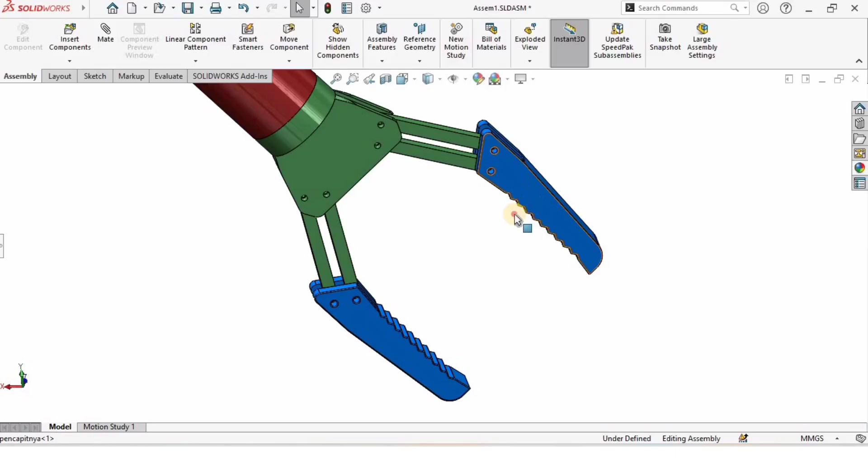In this tutorial we will be modeling a part of this robotic gripper in SOLIDWORKS. So we will be modeling this simple link in SOLIDWORKS. So let's begin. Open a part file and change the background to plain white and make sure that you are working in MMGS, millimeters, as units.

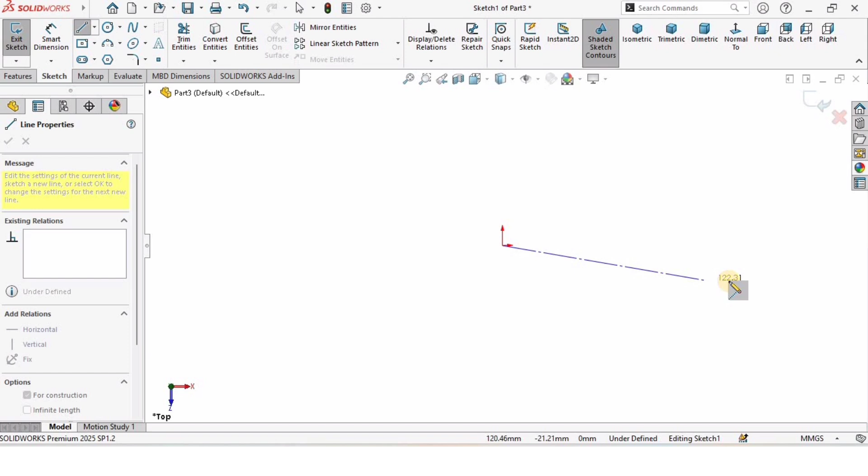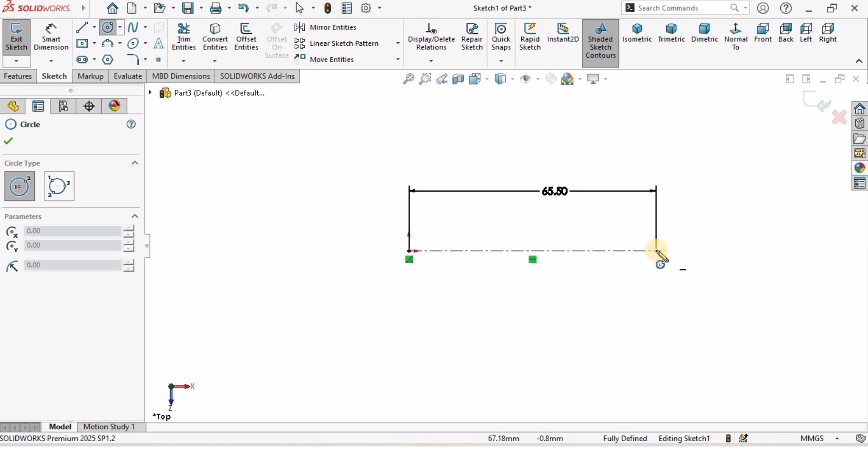Then I will create a sketch on the top plane. First I will create a reference center line at this origin. I will ensure that this line is horizontal, so I will assign a horizontal relation to this one. After that I will specify the length of this line as 131 divided by 2, or you can say 65.5 millimeters.

Okay, after that I will create a circle at this point and another circle on the same point, and then I will specify the diameters of these. So circle 1, this is 5, and the second circle, this diameter is going to be 14 millimeters. Okay.

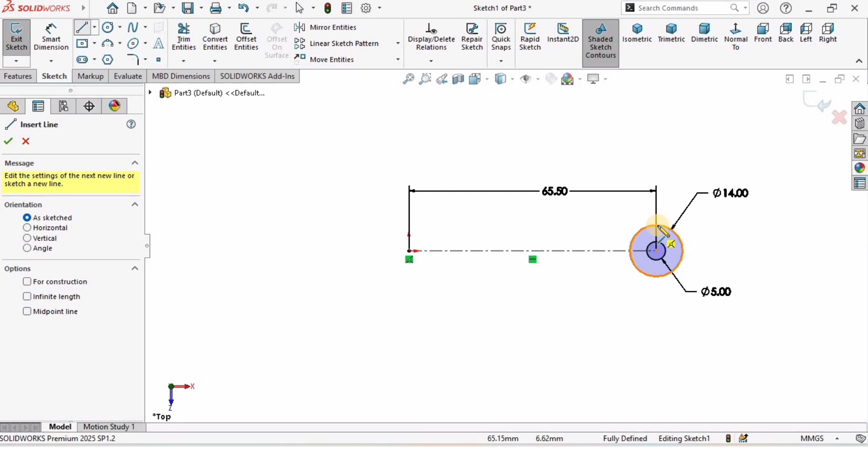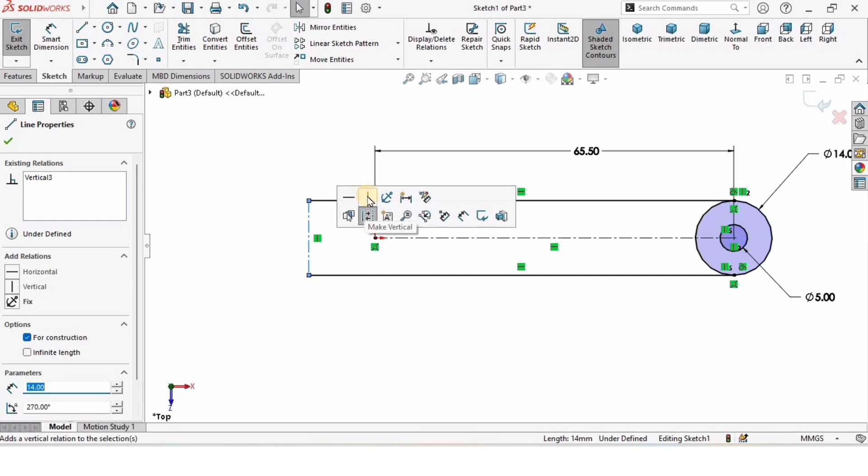After that I will select a line and I will hover over the circle. I will guard the yellow dot and create a horizontal line and another horizontal line. Make sure that these are perfectly horizontal. You can assign horizontal relation if you want to. Then select a center line, join these 2 points and ensure that this is vertical, and you can assign a vertical relation as well.

Now I will hold the control key, select this origin point and this point of the center line and make the relation coincident. You can assign it from here as well.

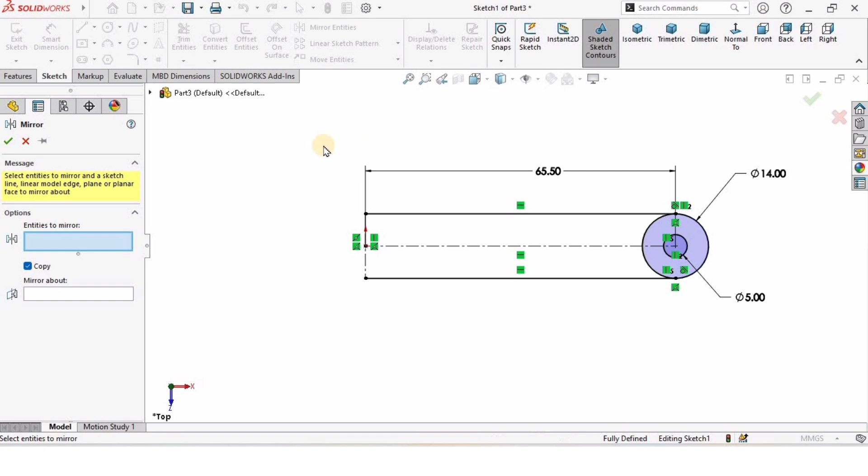Okay, now I will select the mirror entities, and in this window I will select this entire sketch, and as you can see the lines have been added, and in the mirror about window I will select the reference center line and check the box. And now we need to trim some entities, so I will select trim entities and I will trim these internal arcs. Okay, now our sketch is complete.

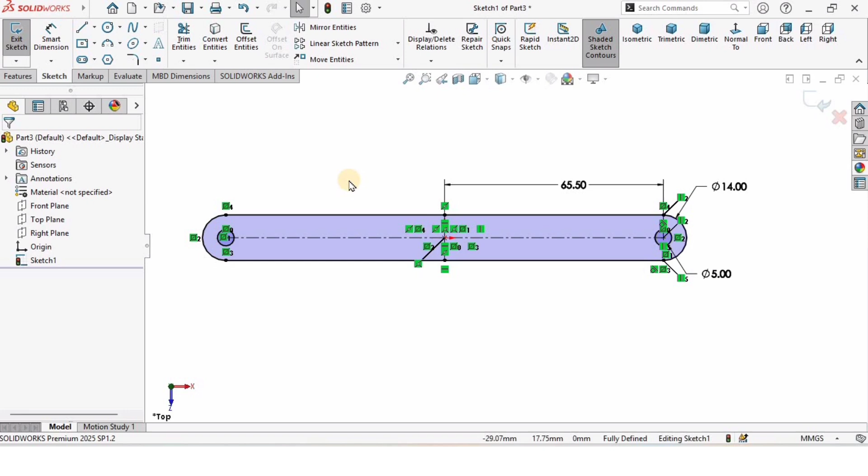So I will go to features, I will select extruded boss/base, and I will specify the length of extrusion as 15 millimeters, and I will check the box. Okay, now I will simply assign any material. This is an optional step, you can assign any material you like.

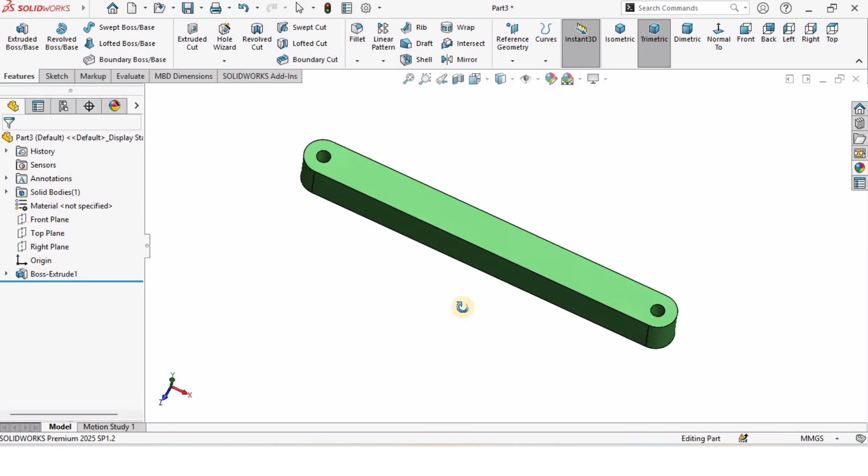I'm assigning this green one, and our gripper link is ready, and now we can save this file, and I'm going to name it as gripper_link, and in our future videos we will be assembling this with the robotic gripper. Thanks for watching.